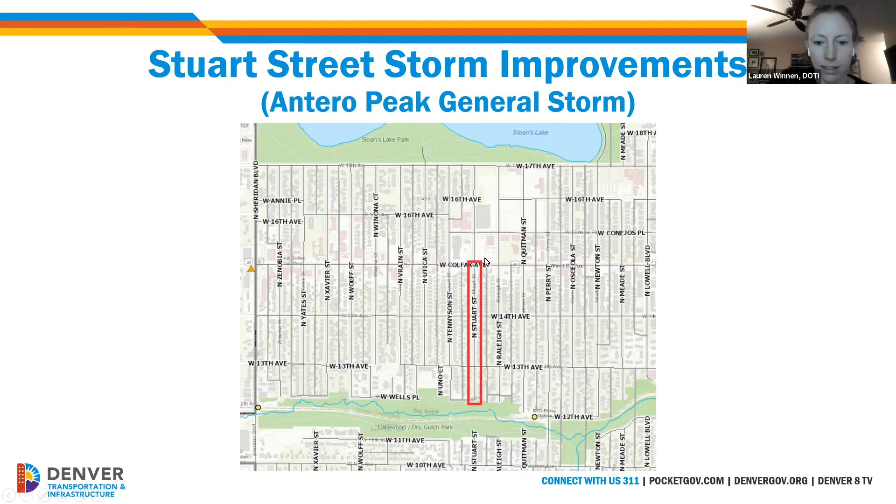This is a stormwater driven project. We'll be intercepting flows from an existing system in Colfax and rerouting them to Dry Gulch via Stuart Street. This will help relieve some flooding on Colfax further to the east, and also collect local flows along Stuart Street. You can see on this map we've got pedestrian crossing improvements on the south side of Colfax that'll be part of our project, and we'll work with the Colfax Ped and Transit project to make sure our designs work together and our storm project coordinates with theirs.

We'll be doing the curb ramps on the south side; they'll be doing the curb ramps on the north side. On Stuart Street itself, you won't notice a whole lot of difference other than new inlets, little entryways and grates for the stormwater to go, and then it'll all be repaved. There's a little segment just north of 13th where sidewalk is missing that we'll add in. There will also be some water quality enhancements just south of Wells, which will look like little swales, grassy areas with boulder drops, and an outfall to Dry Gulch.

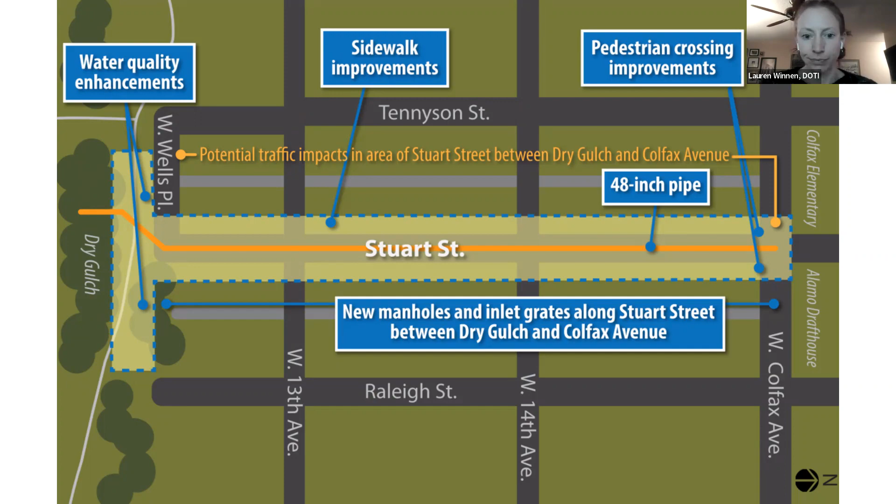This is a lot on these plans, you don't have to know exactly what's going on, but I wanted to show you what these curb ramps look like now on the south side of Colfax. Those will be updated to be directional, so there'll be one crossing Stuart and one crossing Colfax, and then the Ped and Transit project on Colfax will come in and add a median to make that crossing a little safer.

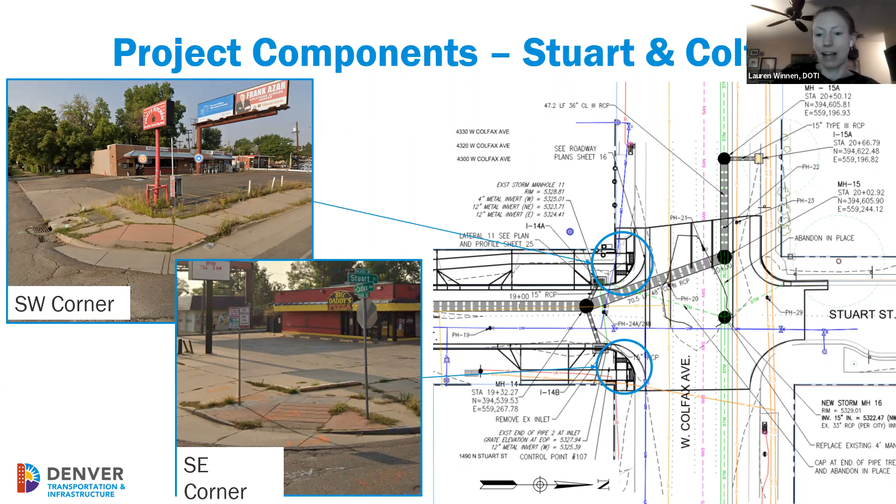This is the south end of the project, at Stuart and Wells, and Wells and Tennyson. We'll be adding curb and gutter on that south side, cleaning that up a bit, and making some drainage improvements.

Some of you might be familiar with the Tennyson bike project coming in the future. We've worked with them to make sure what we're doing doesn't interfere with what they're doing. They'll come in after us with signage about the bikeway and some markings on the pavement.

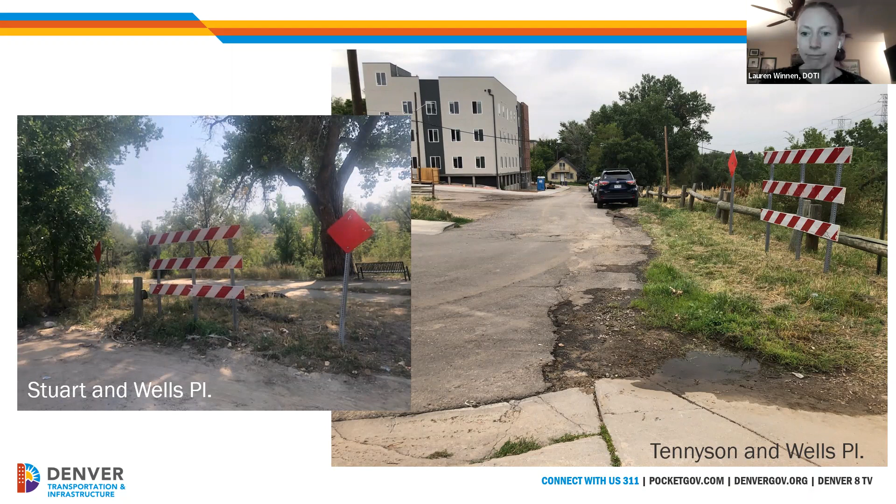Here's our schedule. We're at the beginning of 2023, working on getting a contractor on board now, hopefully by this spring if not summer. The work in the Gulch needs to be done during the drier season, in the fall, so that'll come later. We'll likely prioritize the work on Colfax first so the Colfax Ped and Transit project can come in. That work on Colfax will probably occur this summer to fall, and then the remainder of the project will follow, taking about a year total.

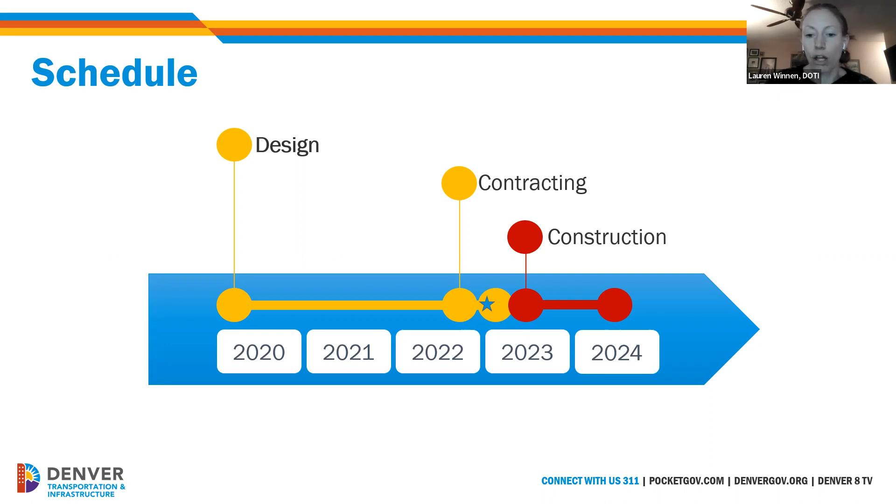During construction, there will be a trail detour for the Dry Gulch Trail between Raleigh and Tennyson, and we'll close one block at a time on Stuart Street, so you'll be rerouted along other streets.

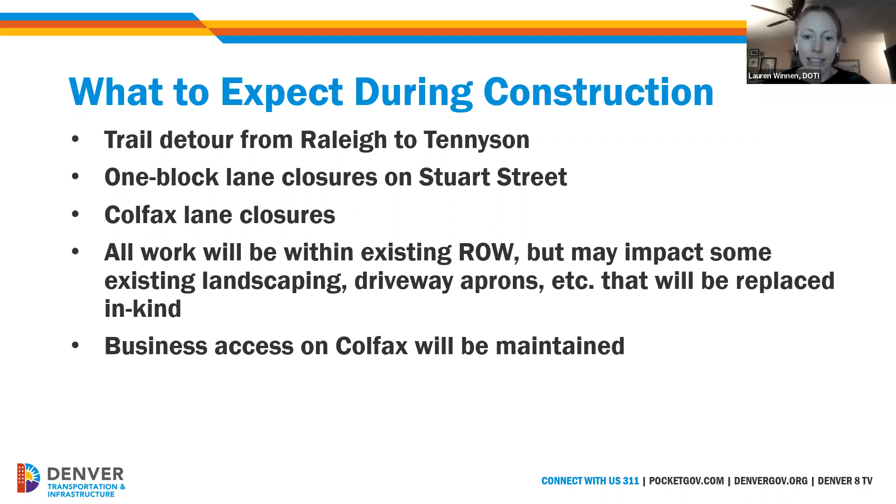Colfax will have lane closures, but we won't be doing a full closure, just one lane at a time. All work will be within the existing right-of-way, so nothing on private property, but some landscaping on Stuart Street is within the right-of-way, so that area next to the sidewalk could be impacted, though everything will be replaced back to how it was, including driveway aprons. Business access on Colfax will be maintained.

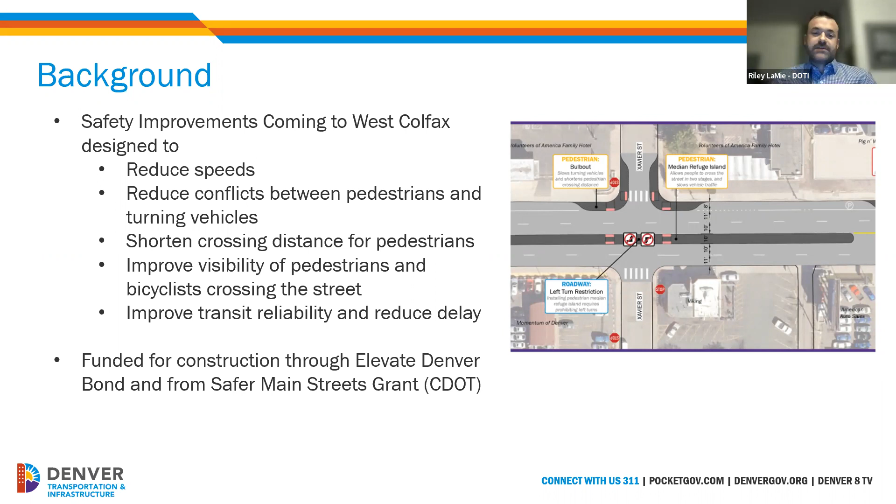This project is funded through construction by the Elevate Denver Bond Program, as well as a Safer Main Streets grant we received through CDOT. The project is fully designed, and we will be sending it out to bid for construction soon. But let's go to the next slide for a little background on timing.

We began planning permanent improvements to West Colfax back in 2019, holding a series of community meetings to discuss what the improvements should look like and to let the public weigh in on those specifics. Then from 2021 through last year, 2022, the project moved into the engineering phase, where a lot of work went into actually designing it. That brings us to where we're at now — ready to go to construction very soon.

I believe we expect the project to go out to bid sometime in March. It usually takes a couple of months between when a project goes out to bid and when a contractor actually begins construction, so we currently anticipate construction of these improvements will start this fall. We're excited to be at this point in the project — it's been underway for quite some time, so we're looking forward to getting these improvements in the ground.

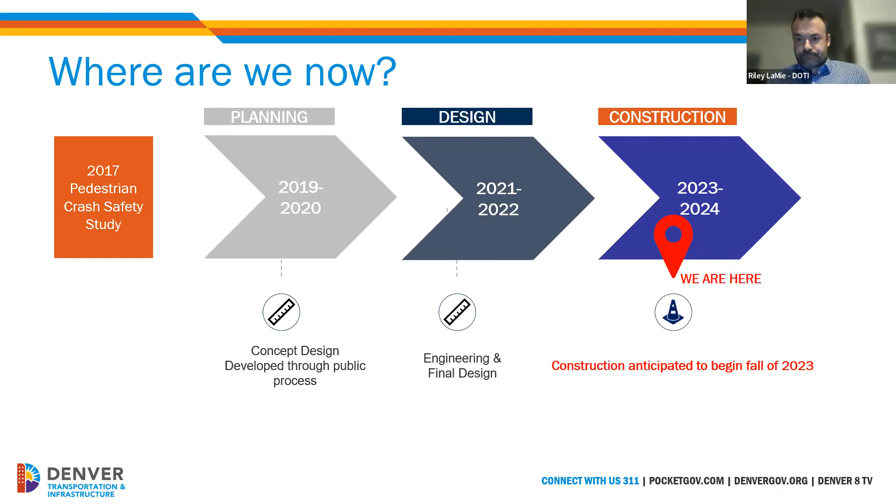Just to provide a little context, the project I'm talking about covers improvements between Sheridan all the way to Irving Street. So when I say West Colfax, improvements will be made at intersections all along that stretch of the corridor.

I wanted to talk quickly about some improvements recently made back in 2020. Based on some crashes we were seeing, we made improvements to improve safety in the near term, knowing this longer-term, more permanent project was coming. One thing we did was adjust the signal timing to reduce speeds — the timing was adjusted so that a vehicle going too fast or excessively speeding will hit a red light. That's one tool we've used to slow down speeds.

Another thing we did was install what's called a leading pedestrian interval at several intersections between Sheridan and Lowell. This gives a pedestrian a head start to cross the street while the traffic light remains red, providing a protected way to cross before the rest of traffic gets a green light to proceed through the intersection.

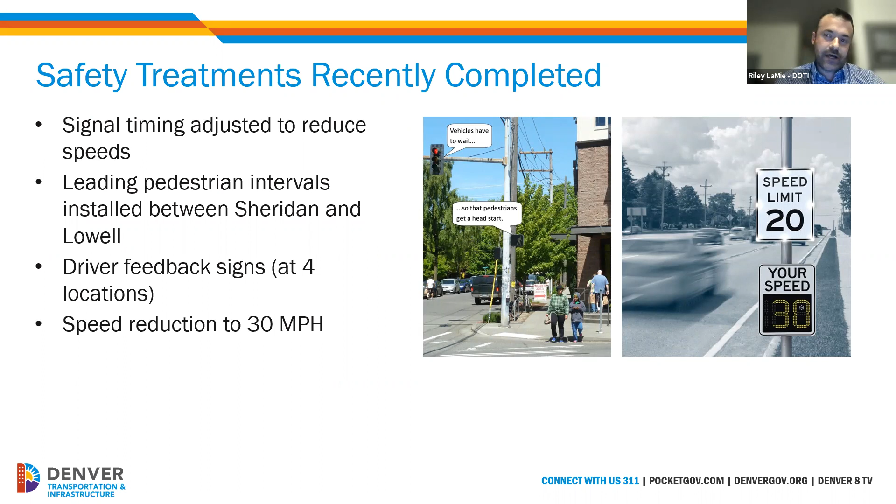We also installed driver feedback signs at four locations — signs that show drivers how fast they're going — and reduced the speed limit on West Colfax down to 30 miles an hour.

This slide shows some of the locations where leading pedestrian intervals were installed — about six locations on Colfax. An additional longer pedestrian phase, called an all-pedestrian phase, was installed at Colfax and Irving, meaning the lights stay red for everyone and pedestrians get the right of way to cross. It's similar to what's done downtown, where lights stay red for all traffic while pedestrians cross.

Riley, can you tell us what LPI means? Yeah, as a reminder, it stands for leading pedestrian interval, and it gives pedestrians a head start — the walk signal stays lit for pedestrians while the traffic light stays red.

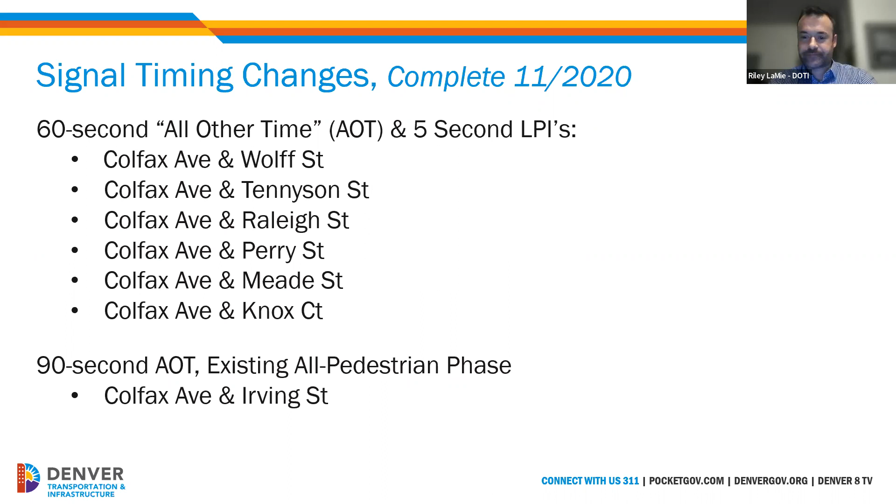We've seen overall safety improvements as a result of installing the leading pedestrian intervals and changing the signal timing. Looking at data between 2016 and 2020, there were quite a few fatal crashes and serious injury crashes during that 5-year time frame. Fortunately, since implementing those changes between 2020 and 2023, over the last two years, we have not seen any fatal crashes on West Colfax.

We have unfortunately still seen some serious injury crashes, and that is what the more permanent improvement I'm going to talk about in just a minute will help address—reducing those crashes.

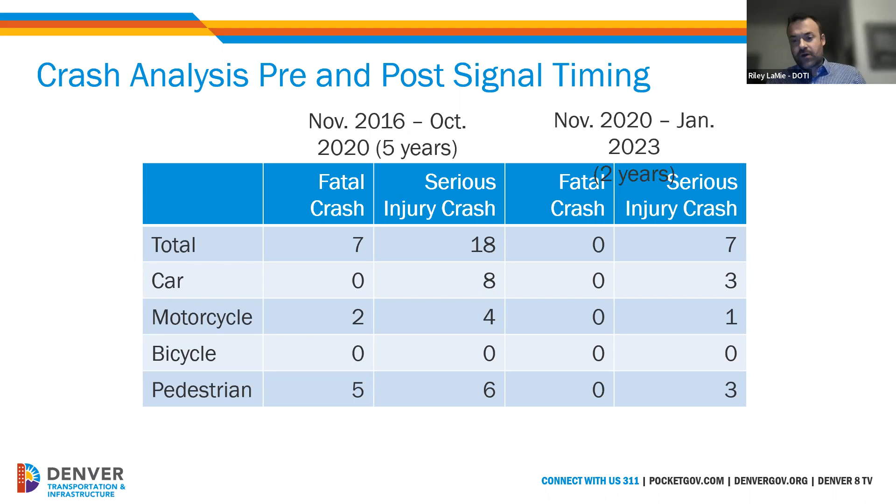If you can go to the next slide, I want to go into more detail about what's included. DOTI will be constructing pedestrian bulb outs at 17 intersections. Quitman will be one of the locations where we're installing a pedestrian bulb out. I'll explain in a few minutes what a pedestrian bulb out is, what it looks like, and how it helps improve safety.

In addition, we'll also be installing about 8 new landscaped median islands. Right now, if you're driving or walking down West Colfax, there are 2 lanes on either side, plus a parking lane, as well as that middle lane. That middle lane will go away in a lot of locations, and instead we'll provide a landscaped median. We're also planning to keep the medians open at Vrain and Lowell Street, so we can accommodate signals in the future and add new controlled places to cross the street.

We'll also be adding a bus bulb out—an expanded waiting area for folks taking transit. To increase the speed and reliability of transit, we'll also be installing special signals that allow buses to communicate with the traffic lights, giving a bus priority on Colfax when they're trying to get to their next transit stop.

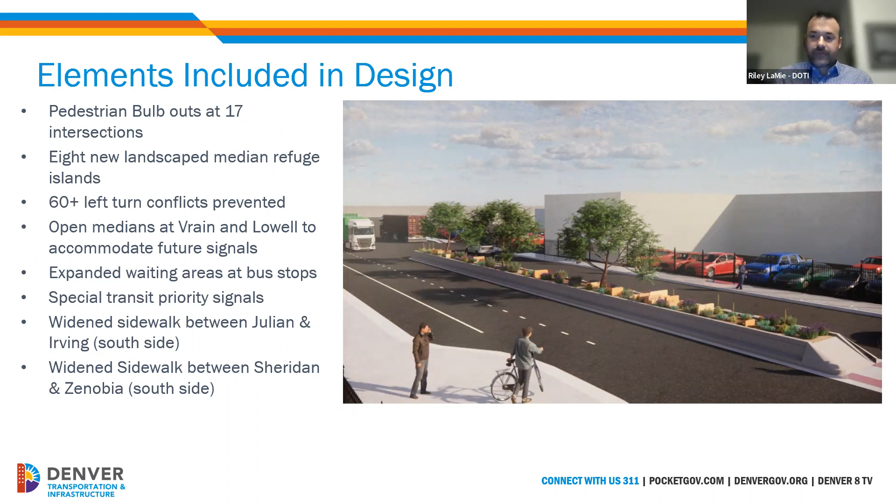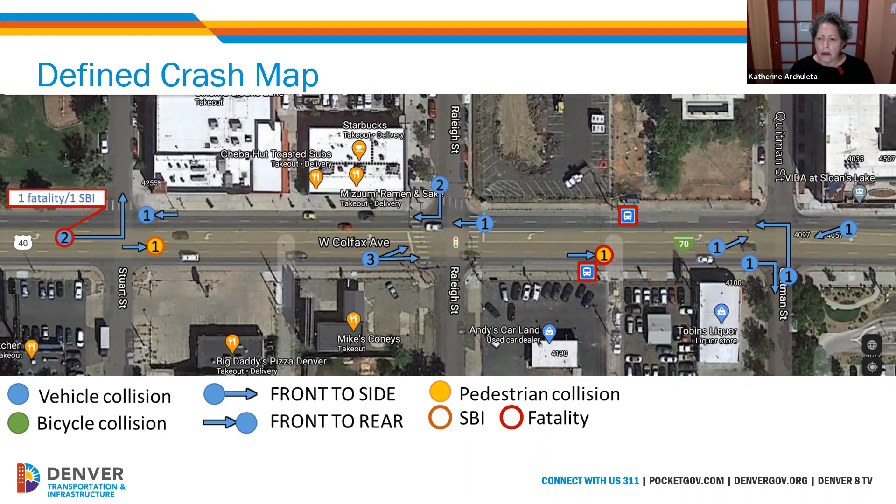So, on the next slide—can we just pause a little bit there before we go into bulb outs and medians, Riley, to be sure any of our participants can ask questions? Anna, Carlos, and Shane, any questions or comments? No, okay.

I wanted to share some information about what pedestrian bulb outs and landscape medians do. A pedestrian bulb out is like an extension of the sidewalk, designed to slow down the speed of a turning vehicle. Sometimes we see crashes that result from the kind of conflicts shown in that slide. Bulb outs and medians are designed to counteract those types of crashes. Both expand the sidewalk at intersections so there's less distance for a pedestrian to cross, and they increase visibility for people crossing the street. Since we sometimes see conflicts between someone crossing and a turning vehicle, this provides more visibility and slows down the speed a car takes a corner, reducing the likelihood that a crash results in a serious injury.

On this landscape, medians are working to accomplish similar things. One benefit is that they narrow the roadway. Typically, when a street is really wide with no obstacles, it can encourage vehicles to go faster—it feels like you can drive faster. By narrowing the roadway with landscaping and medians, we often see slower speeds, so this is a tool to discourage speeding.

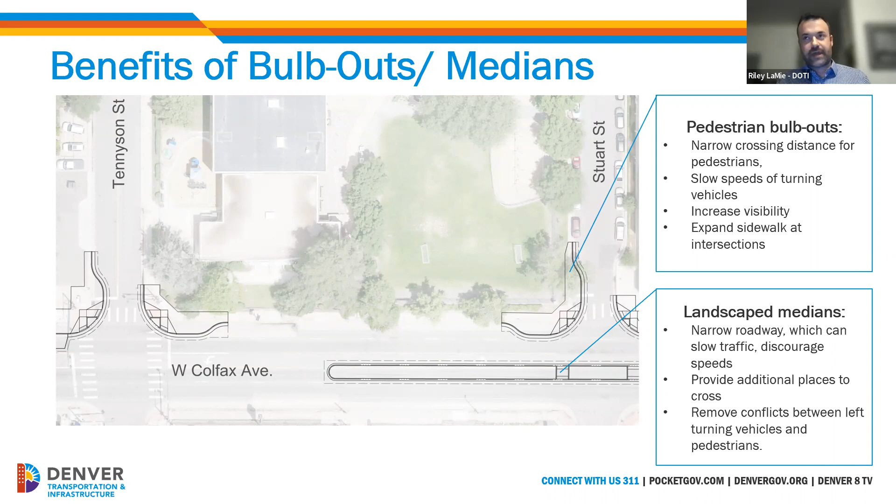I touched on this earlier, but wanted to revisit the transit component. Bus bulb outs are very similar to the pedestrian bulb outs I described—they help slow down turning vehicles and increase visibility, but also provide a more comfortable space to wait for transit. You can think of it as an extension of the sidewalk.

Other improvements coming include consolidation of the number of stops, so a transit bus doesn't have to stop at every single stop along the corridor, which helps reduce delay.

Special signals will allow transit to communicate with our traffic signals so they get the right of way through an intersection. So say the light is about to turn red—they can communicate with the signal, giving them a few extra seconds to get across. That also helps the overall reliability of transit, and as I mentioned, there are a lot of transit users on West Colfax.

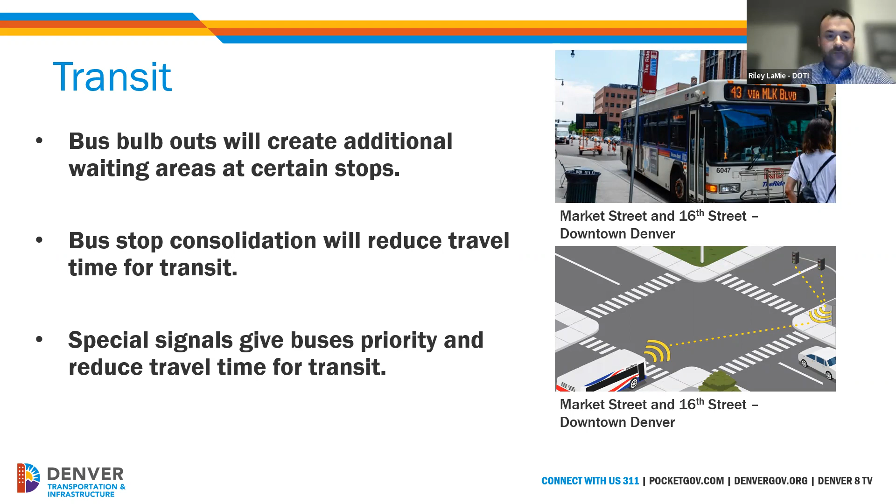On the next slide, I'll hand it over to Brett, who can give an update on the Neighborhood Transportation Management Program, or NTMP. But before that, happy to pause in case there are any questions about the more permanent improvements planned for construction on West Colfax.

Carlos, Shane, Anna or Ann, any questions or comments? Feel free to use the chat as well. No Carlos? No questions at the time. No questions. Yes Carlos—no, no questions here either. Thank you, okay everybody, just wanted to be sure.

Okay, Brett? Yeah, thank you, Katherine. Again, my name is Brett Boncory. I'm in the Transportation Engineering Design group of DOTI, and I manage, like Riley said, the Neighborhood Transportation Management Program. I'm here to give a brief update on some mobility and safety projects we've been designing in the West Colfax and Villa Park area.

Some of you may have been involved in our NTMP action plan process, which ended in 2021. This process engaged over 100 of your neighbors through multiple phases of public outreach, and we had over 900 location-based comments that we sifted through to come up with project recommendations. Then in a second phase, your neighbors helped us prioritize which projects were most important to them, and those are the ones we pushed forward.

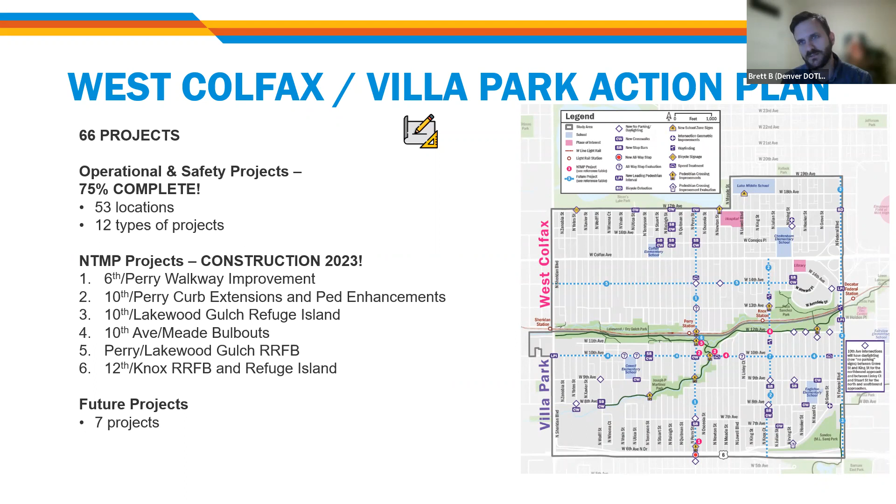Go to the next slide. Questions, comments? No questions. Thank you. Shane says these all sound great.

Is there any other work being done on Sheridan? There are troubles there. Is there any evidence that built environment projects can help with the crime?

I can try to take that one, Katherine. There are other Sheridan projects - I believe there's even a sidewalk project that maybe we can get back to you on the status of. As far as the second part of the question - is there evidence that built environment projects can help with crime - got it.

There's definitely varying evidence. Certainly when we increase lighting on a corridor, that can help with crime from a safety and security standpoint. Sometimes streetscape projects can help as well, and the perception of that investment can sometimes help minorly, but I wouldn't say the correlation is super strong on that. But Riley, I don't know if you had anything to add.

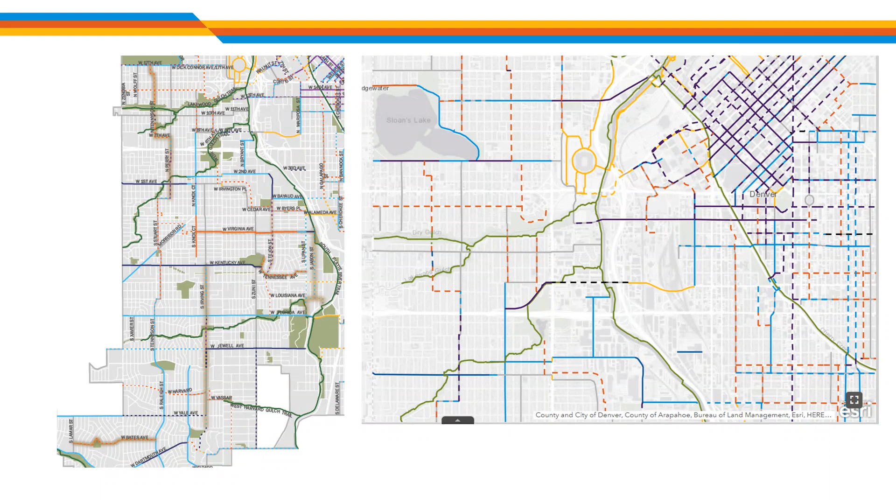What are those bikeway improvements going to look like - are they going to be something like what you have around the Sloan's Lake area? It depends, it could be a range of improvements. For the West Denver Safer Streets, some of those projects may be a protected bike lane, some may be what we call a neighborhood bikeway, which means improvements made on residential streets designed to slow down traffic, usually made primarily at the intersection. For projects that haven't been designed yet, it could be just a bike lane, a protected bike lane, or a neighborhood bikeway - improvements made at intersections to slow down traffic and make it easier to cross. Some of the exact improvements haven't been identified yet, and that's what we'll work with the community on to determine.

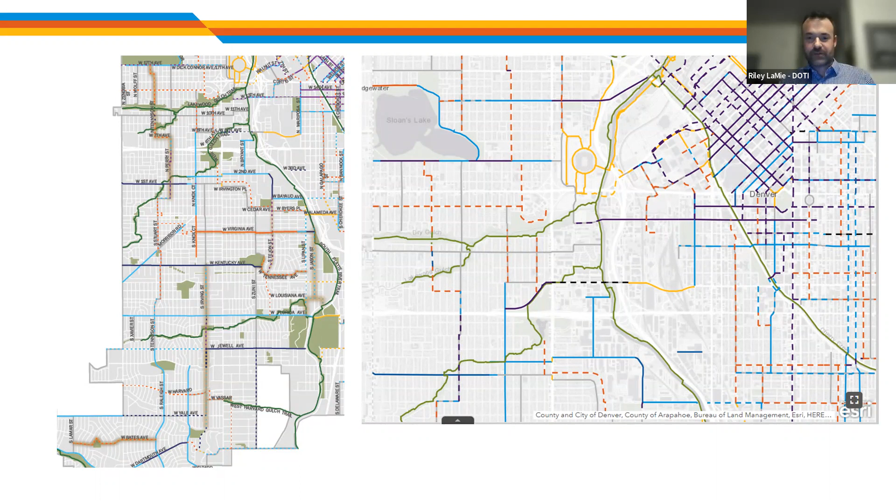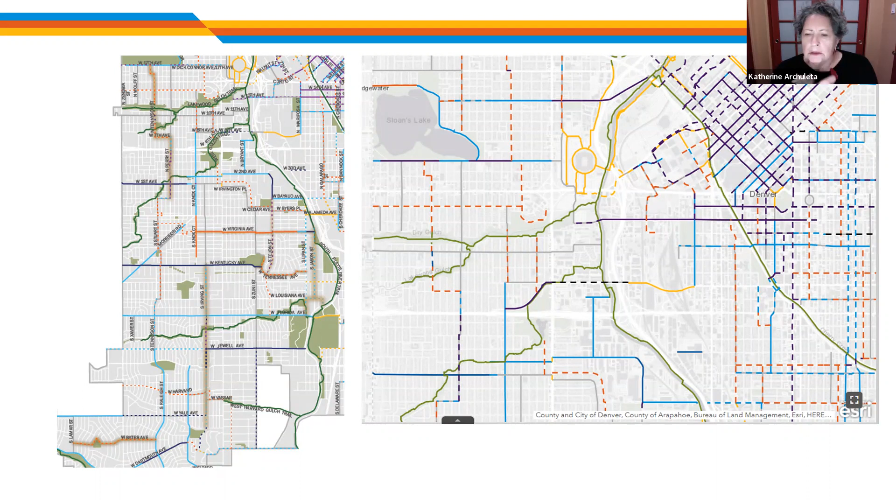So Anne and Anna and Carlos and Shane, we'd like, with your permission, to have a little focus group with you, because we're planning our 2023 West area community engagement. We'd like to be sure we're reaching out on the issues and topics most important to you. If we could spend a few minutes with you as a small focus group to respond to some questions, that would help us better inform and seek input from the community. If you don't mind, Chris is going to lead us through that - feel free to use the chat or turn on your mic. Thank you so much, Katherine.

As a reminder, I just wanted to introduce myself one more time and explain my role and the purpose of the community engagement happening in the West area. Then I'd really love to, again with your permission if you feel comfortable, get introductions from you all - residents and folks on the call - just to better understand you, and then we can jump into some questions as time allows.